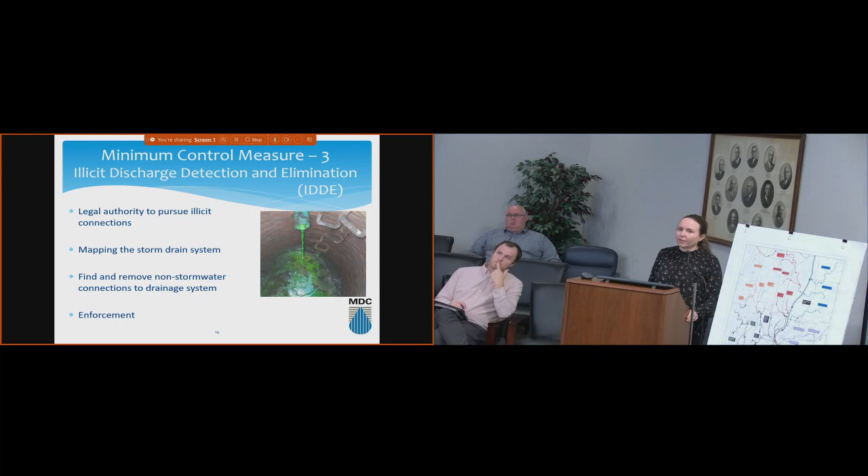And then there's the effort to go into the system and find the illicit connections. Once they find illicit connections, the towns need to use their regulations to enforce them. So on the next slide, I'm going to give an example of how complicated this process is.

This is a typical process for when we suspect there's a connection between the sewer system and the storm drain system. First, we do outfall screening and sampling during both dry and wet weather. The challenge here is there are hundreds of outfalls in each town—we estimate the member towns together have around 3,000 outfalls.

Next, once we've done the outfall testing, we go into the system and test key structures. Basically, we go to manholes, catch basins, and outfalls, and do test kits and sampling to try to find where the illicit connection is coming from—where the bacteria, chlorine, or ammonia comes from. This is a big challenge because it takes a lot of time, and that's where this comprehensive mapping comes into play.

Next, based on that investigation, we try to narrow down where we think the illicit connection is, and commonly we'll CCTV the drains.

So in this, we may find direct connections of pipes going into the storm drain system, and we can also look for cracking, because sometimes the connection between the systems is indirect and can be harder to find, where a sewer pipe could be leaking through the ground into a drainage pipe.

So after the CCTV, we identify buildings that appear to be connected to the system or possibly connected and do dye testing within the buildings. So here, a big challenge is access. You need to contact the owners and do testing within the house. And then even within the house, it's not as simple as putting dye in one sink or one fixture, because often it's an attachment to the building. Often we find that it'll just be one bathroom's connected or one floor drain. So you have to comprehensively inspect and dye test these buildings.

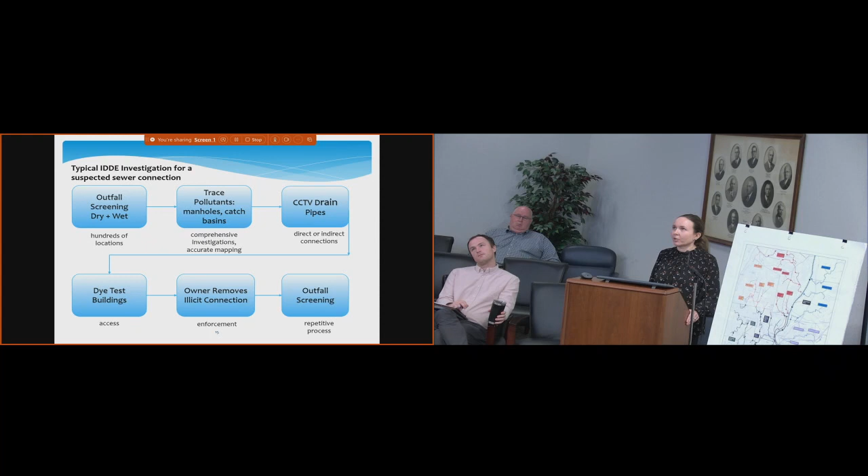So here, the cost of the program is dependent on the drainage system size and the extent of the pollutants. We did review the 2022 annual reports that the towns put online to get an idea of progress, and found that the startup costs, which include the mapping and the baseline dry weather outfall screening, for towns at this point is going to range from $25,000 to $250,000 to come up to compliance. And then the recurring cost to do all these IDDE investigations, we're looking at something on the order of $200,000 to $400,000 per year per town. As you're mentioning, the member towns have 3,000 stormwater outfalls.

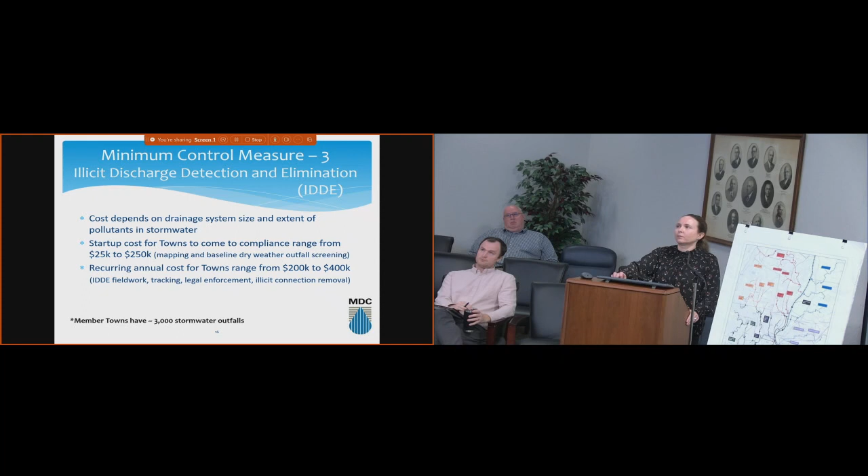All right, moving on to minimum control measure 4. This is construction site stormwater runoff and control. So the issue here is that during construction, polluted stormwater runs off from construction sites and often flows into storm drain systems and gets into water bodies.

So what the MS4 permit action items they're looking for is for the towns to establish regulations for proper erosion and sedimentation control. And as developers come in, the town will review the site plans and make sure they meet those requirements. And then during construction, the town will go out and conduct site inspections and take enforcement actions as needed. Just want to mention that the Connecticut guideline for soil erosion and sediment control, that's the little picture there, was recently updated. The new version came into effect in March of this year, and that covers a lot of the requirements.

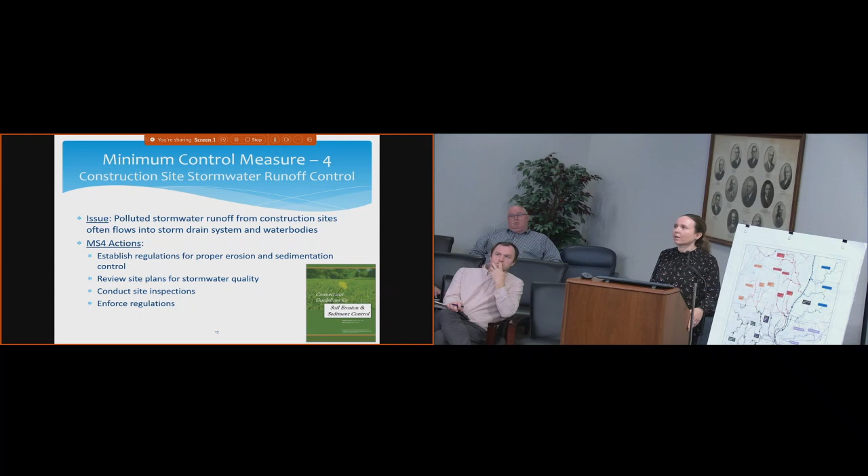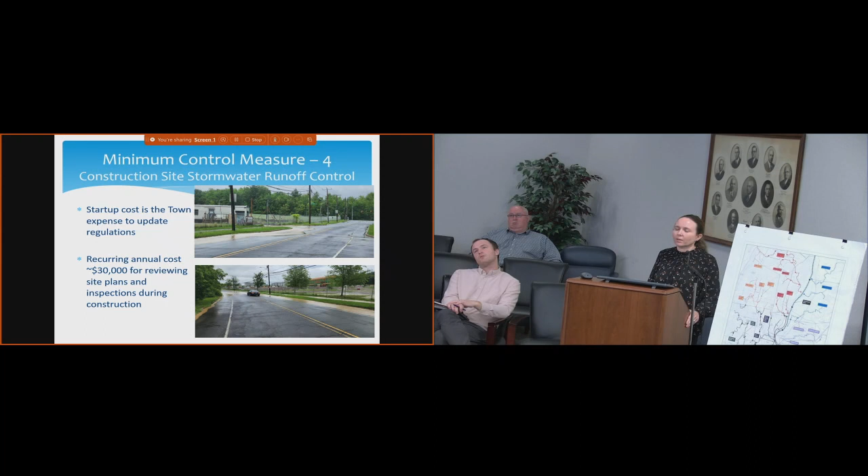So the startup expense for this minimum control measure would be related internally to how much it costs the town to get the regulations in place, and then about $30,000 a year for reviewing the site plans and conducting inspections.

Our next minimum control measure is post-construction site runoff control. So the idea here is that when a site is going to be developed or redeveloped, it's an opportunity to improve the stormwater conditions at the site. So the towns need to establish regulations that require the developers to treat the stormwater and store the stormwater on site.

Again, the state recently updated the manual, the Connecticut Stormwater Quality Manual. That went into effect March of this year. That has more of the MS4 requirements. One of the challenges with this is that the towns require developers to put in detention basins and Stormceptor units, and those items all require maintenance. So either the town needs to enforce that these private systems are being maintained, or they're not going to meet their use, and that's where you get into enforcement.

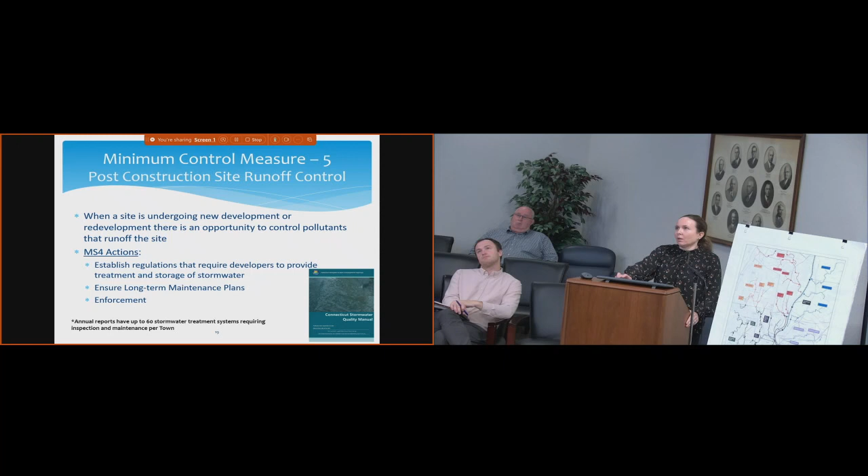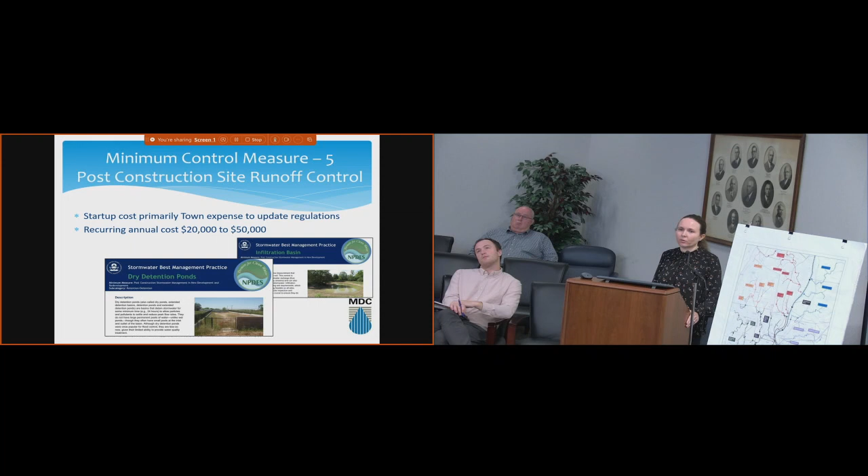So the cost for this minimum control measure, again, the startup is related to the town updating their regulations, and then a recurring annual cost in the range of $20,000 to $50,000.

The catch basin program is a big program. Towns need to inspect the catch basins and set up a cleaning program. No catch basin sump should ever be more than 50% full, so it's a process of learning about the system and then setting up a program to regularly clean the catch basins.

The streets need to be swept at least annually, and it's the same sort of thing where the town should set up and understand their system, knowing which areas need to be swept frequently and which could be on more of an annual basis. The two play in together—if you do more street sweeping, perhaps you have to do less catch basin cleaning.

The next one is an asset management system. The MS4 permit does require that towns maintain and repair their infrastructure, so they need to make sure that the catch basins, manholes, outfalls, and pipes are all in good condition.

And the last one is a really big item for towns: reducing the amount of directly connected impervious area, DCIA. So the idea here is that towns reduce the amount of impervious surfaces they have, and we have a few more slides on this.

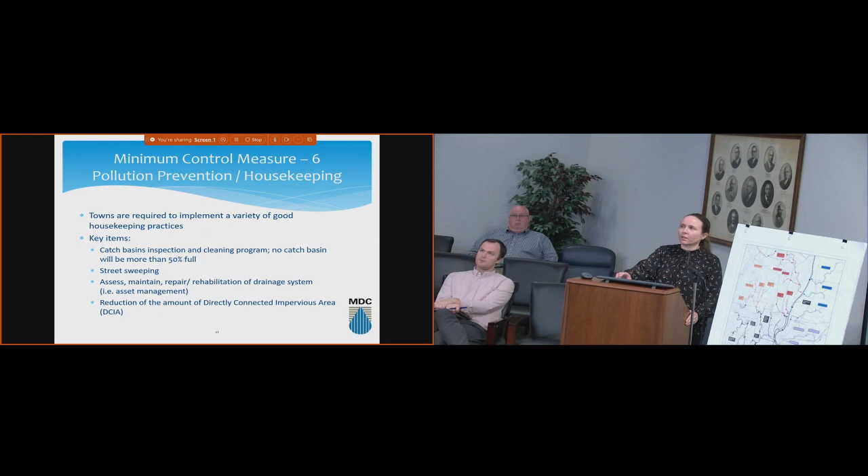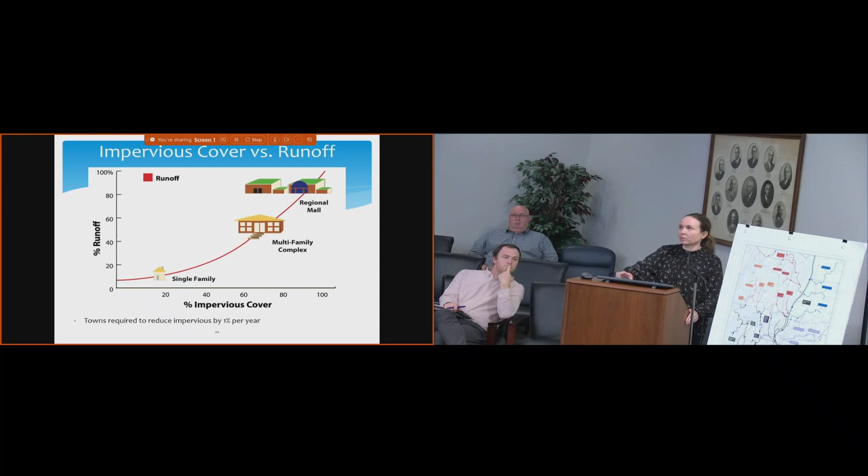And here's a little bit more language from the permit describing the process. First, the towns were to set up a baseline DCIA—they figure out an acreage of impervious area for their town. Then, by the fourth year of the permit, they should be reducing this acreage by 1%. At this time, 3% should have been completed.

This has a very high cost for the communities, we have some numbers coming up. To give you an idea of how towns can achieve this, first they can look through regulation, requiring that developers reduce the DCIA. If you can get a developer coming into town to meet this for you, it's basically a no-cost solution.

Next, if you already have public projects underway, you can incorporate some DCIA reduction and do this at a lower cost. Once you've tried both of those, you get into what they call retrofit projects, which are projects where the intent is specifically to meet this DCIA reduction.

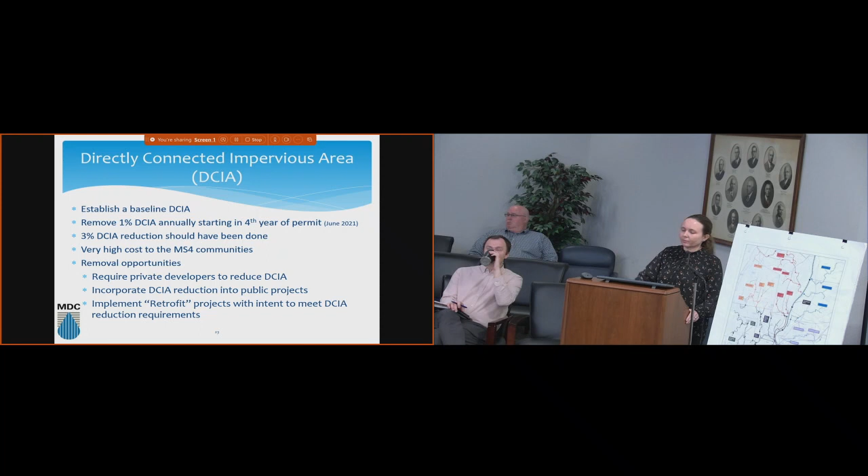So here is a summary of the 8 member towns, based on both internet sources—the CT NEMO has information on impervious cover—and also reviewing annual reports. Altogether, the 8 member towns have about 15,000 acres of baseline DCIA. Every year we should be reducing that by 1%, so that's 151 acres per year. At this time we should be around 453 acres removed, and as of the 2022 annual reports, we're only at 3 acres.

So lessons learned: we spent $1.8 billion and it took us 50 years. The Clean Water Act was 1972, and finally in 2008 we started doing something about it. This is setting the stage for our towns to see a consent order, a consent decree.

This is looking through the forest, through the trees. With sampling, the more our towns don't comply, the more data builds up. The way EPA works—they're doing it right now with the lead and copper rule—is they test, create data, and utilize the data to develop regulations. So this is scary to look at these numbers for our towns. I think that this regulation is almost impossible to meet.

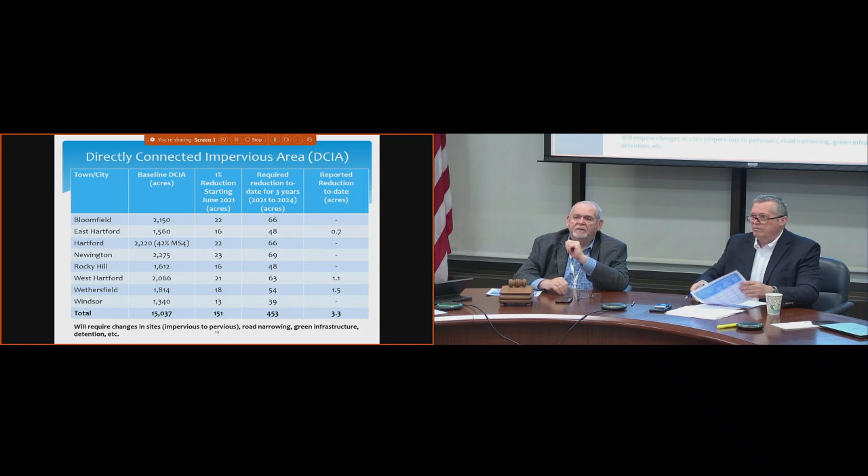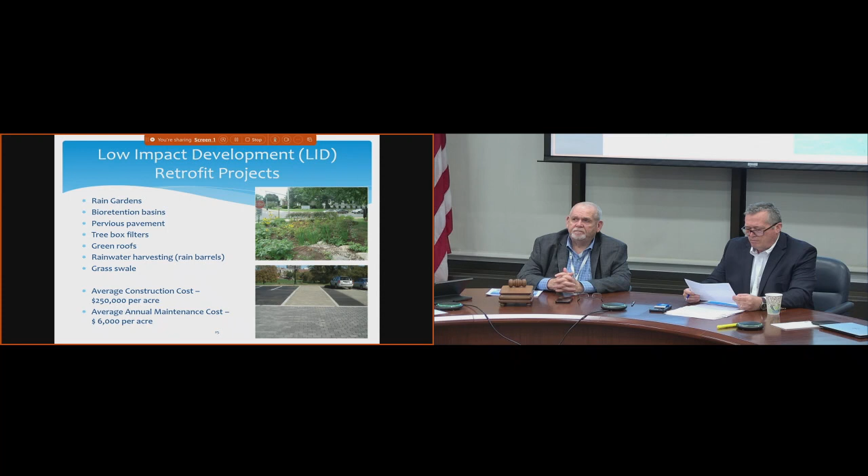So there's a lot of options for reducing DCIA. I already mentioned getting developers to do it. You could also do road narrowing, detention basins. Green infrastructure is something the state is very interested in, and green infrastructure is also called low impact development.

So here are some projects that could be done: you could add rain gardens, bioretention basins, pervious pavement, green roofs, grass swales. There's a variety of these types of options for dealing with the DCIA requirement on a smaller scale.

For this type of low-impact project, the average construction cost is $250,000 per acre, and the average annual maintenance cost is $6,000 per acre.

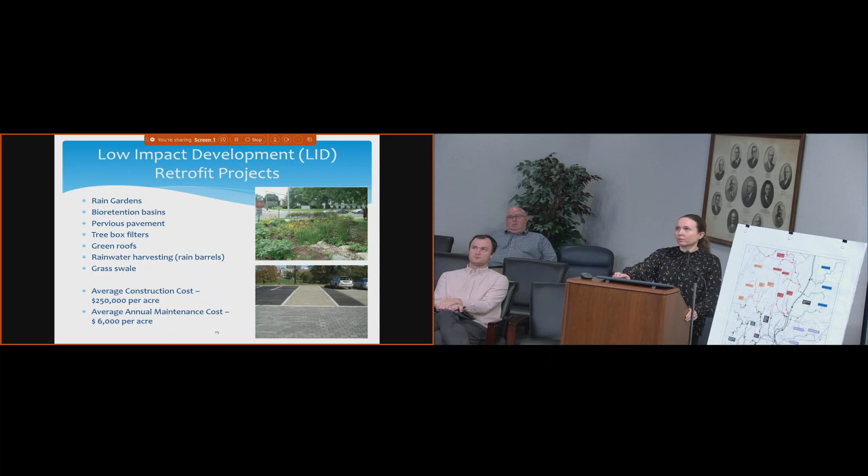I just want to touch again on asset management, because this is a big program as well. The town should be inspecting the stormwater infrastructure to know if the pipes, manholes, and catch basins are in good condition. So this will be a big CCTV program as well as tracking so that they can repair the system.

Stricter regulations are always coming. Now there's kind of a struggle with disposal. You've got the catch basin debris and the decant wastewater from the catch basins that are becoming more challenging to dispose of, often requiring dewatering at a separate site.

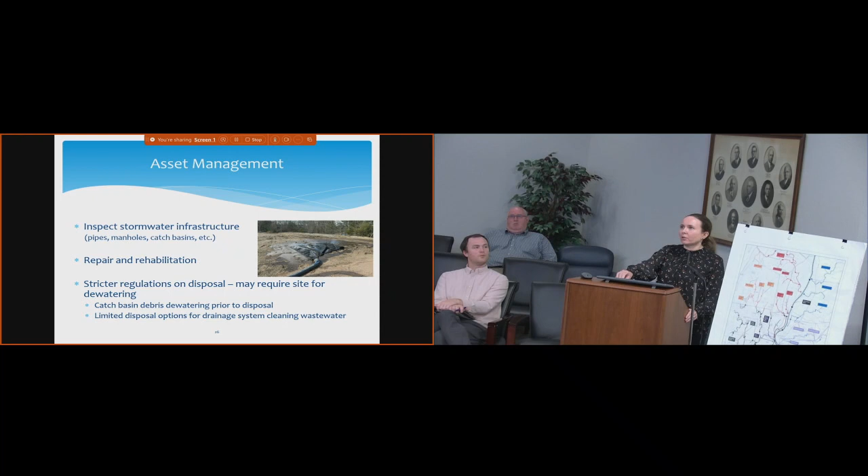And as we're mentioning, these things are related, so if you clean the catch basins more often, you'll prevent debris getting into the system and reduce the pollutants getting into the stream. So long-term, having these maintenance programs will help with your results.

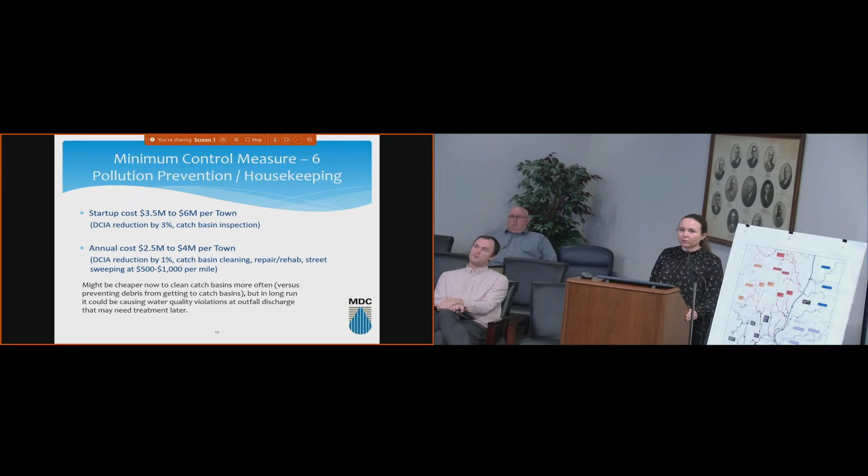And just to add to that, some towns might decide it's cheaper to clean the streets than it is to clean the catch basins, or vice versa. But remember, whatever you do, this is all about being proactive. If you decide not to clean the streets first and just clean the catch basins, that means you're testing as well—you've got 3,000 outfalls, you're creating data.

And every piece of data you create that shows bad results, EPA is putting it in your future consent order. So it's really important—when you decide it might be cheaper to clean the catch basins more often, if you clean the streets more often instead, you're not creating the water quality testing problems at the testing points at the outfalls. Yep, those are great points, Scott.

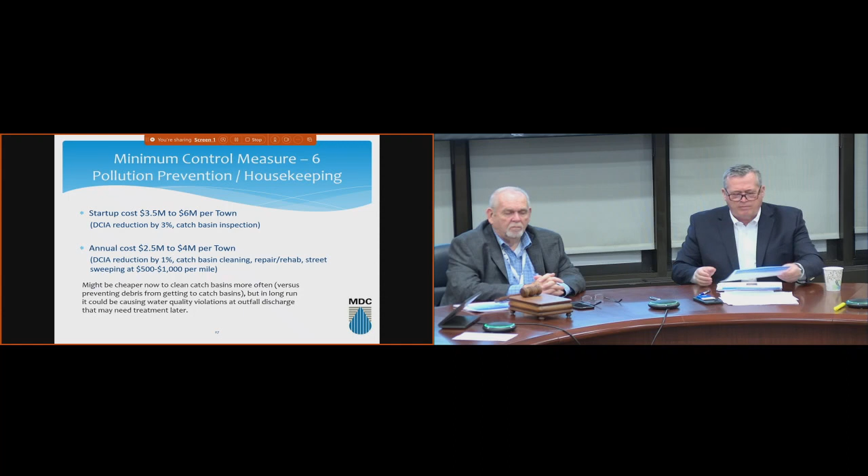And I have here, fitting in with that, a detailed list of the outfall and interconnection requirements. They fall under a couple of categories, but there's both wet weather and dry weather requirements. The outfalls that discharge directly to impaired waters have more requirements, and the IDDE program is a 10-year program, so by the end of 2027, towns should have done those catchment investigations. In most cases, it's townwide for the member towns.

And this data is all being sent to DEEP annually so they can see your progress. They know where your outfalls are. They know if you have clean outfalls or exceedances and what follow-up work you're doing.

And the word interconnection, I'll just touch on that briefly. We estimated 3,000 outfalls where the stormwater discharges through a pipe into a water body that everyone's familiar with. The interconnection is where two MS4s meet, and in most cases for the towns, it's where the town MS4 system discharges into the state MS4 system—so the town pipe goes into a state road. That location where it discharges is called an interconnection, and those are to be treated as outfalls as well.

So all the requirements of sampling and IDDE are required at those points. And I feel like a lot of towns are still working on the mapping of those and coordinating with the DOT.

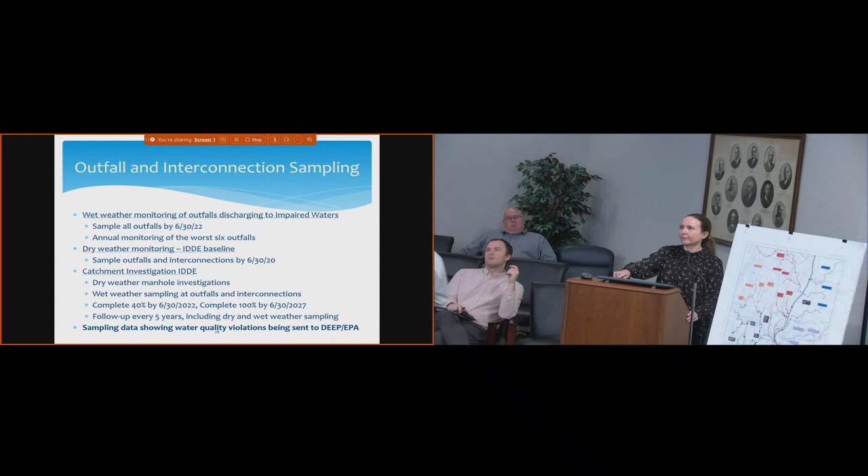So the cost for towns to come into compliance is in the order of $100,000 to $250,000, and then going forward, the outfall sampling cost is around $75,000 to $100,000 per year.

So, compiling all those numbers that were spread out through the presentation, we came up with about $41 million for the towns to come up to compliance, and then going forward, about $31 million per year to maintain compliance.

I think that's the end of my slides. Let me just check.

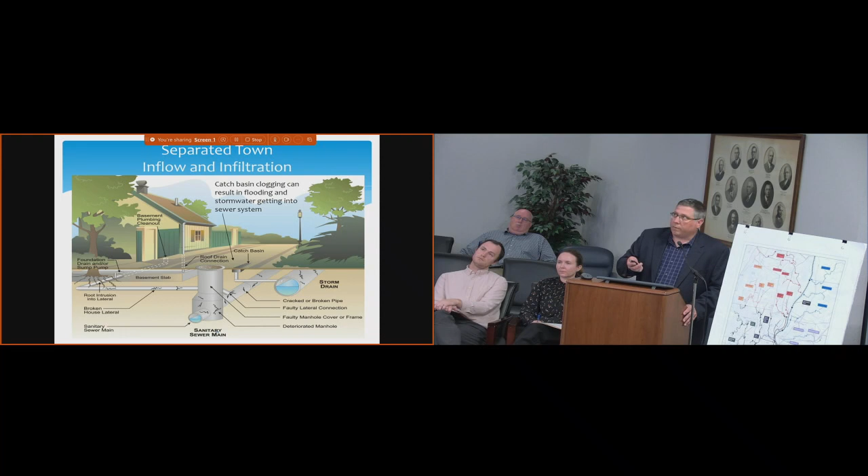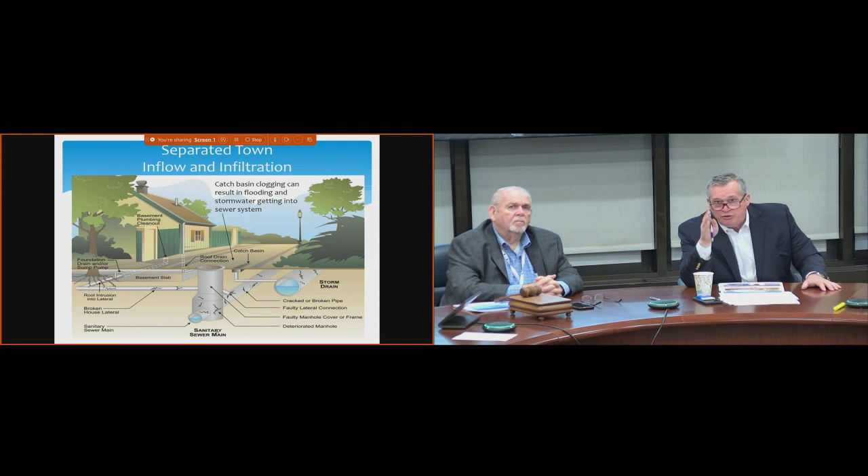And this is the ironic part: Hartford is a CSO community, one pipe. Now we're changing that. We're going to separate everything, and we'll have brand new storm pipes over the next 50 years. But the majority of our 7 towns don't have the storm pipe, but they're supposed to, because it's a separated sewer system regulated by EPA. So what happens when there's no storm pipe in a separated storm system regulated by EPA, not the state of Connecticut? The water comes into the MDC system through basements, through foundation drains, through rain gutters, and that's part of the problem. There's no storm pipe everywhere in our other 7 towns.

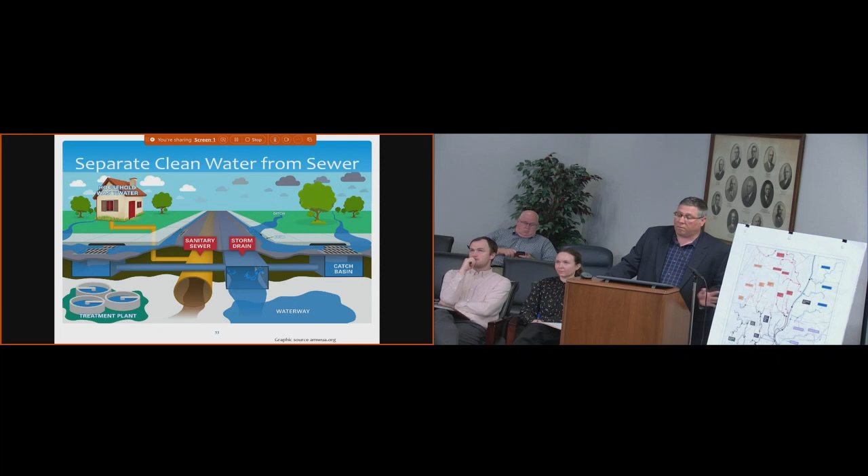So if you were to build a new development today, this is how you would build it, and this is how it would function. Sanitary goes to sanitary sewer, storm drainage goes to storm drain, which ends up in a waterway. Obviously, the sanitary sewer eventually ends up at the treatment plant. No defects, no cracks, a completely perfect system.

Unfortunately, our system is not perfect. This is how you end up with numbers such as shown on this slide. Some of you have probably seen this picture before at other presentations, where in each town you've got two numbers shown on the screen. I'll use Bloomfield as an example, 2 MGD. What that means is on a dry weather day, 2 million gallons a day comes from Bloomfield, which greatly matches the water sales plus some low-level infiltration. However, on a stormy wet weather day, that number can get up to 11 million gallons a day. So that's that extra stormwater that's coming into our system.

Right now, when you add it up across all of the district's 8 member towns, that adds millions of dollars a year in extra transport and treatment costs.

Now, unfortunately, as we proceed through our consent decree work and get this water out of our system, the water just doesn't disappear. Whether it means extra groundwater elevating the groundwater table, or somehow it has to get connected to a storm drainage system - it's kind of like that picture from middle school we all probably remember from science with the water cycle. We don't wave a wand, it doesn't just go away. So as we get it out of our system, it's going into something else, whether it be the town's stormwater system or a water body or whatnot.

But even that, which I'll get to, affects everyone.

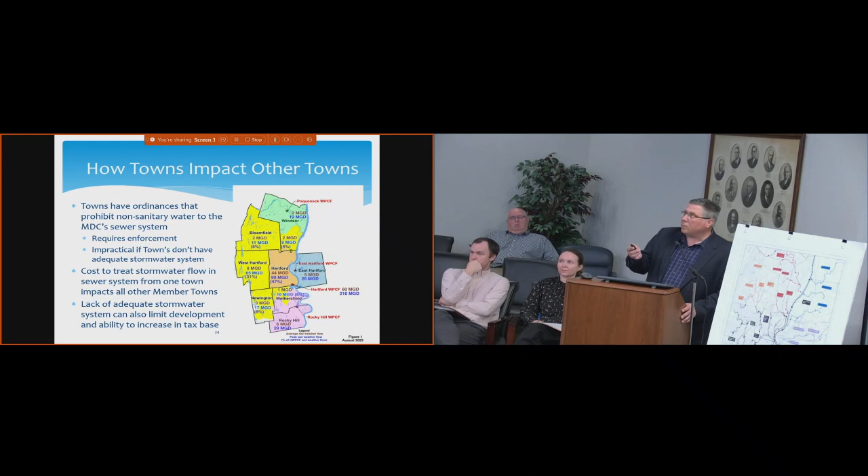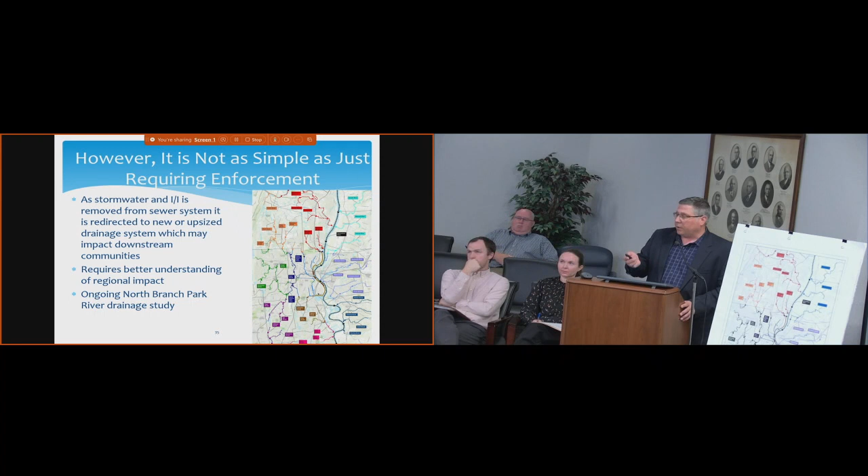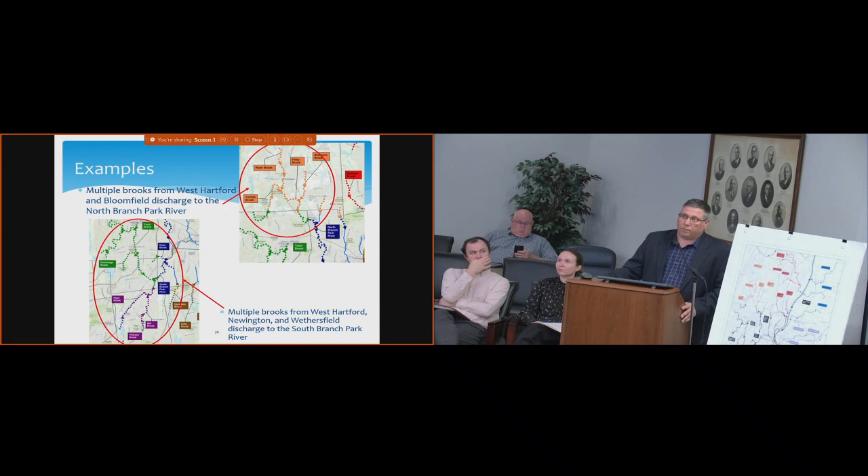Now, as Emily focused on in the MS4 presentation, MS4's priority is pollutant control.

As Emily mentioned in her presentation, MS4 is primarily focused on pollutant control. It is not focused on street flooding—MS4 doesn't care about street flooding. Obviously, there are activities within MS4 that can cause more street flooding to occur, but the regulation itself is not focused on street flooding.

However, as many of you in this room know, the complaint you're going to hear from the public is flooding—whether it's yard flooding or street flooding, that's the most common complaint with regards to stormwater. So as some member towns decide to initiate a stormwater project to fix flooding at an intersection, you have to remember that water eventually ends up in another town. For the majority of our towns, it ends up in Hartford, but as that happens, it's going to end up there.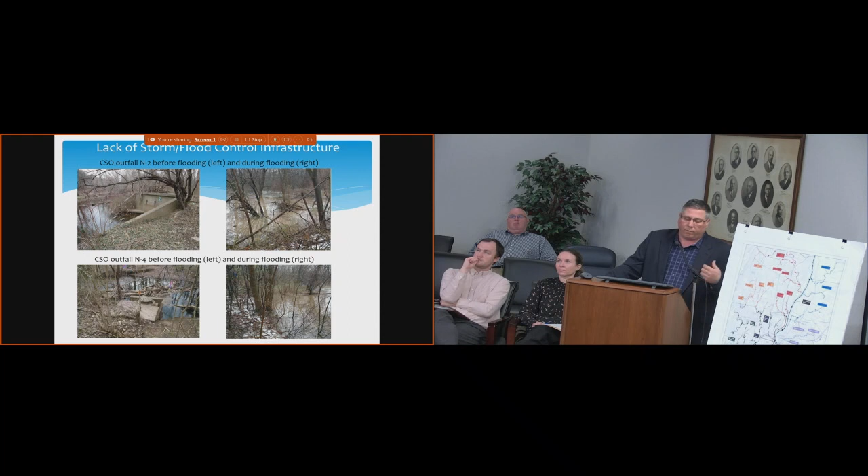The outfalls on the left flow fine on a low river day. However, on days of extreme wet weather with a lot of drainage coming from upstream, that river has a very high, quick peak—that's what happens in the pictures on the right, the same exact locations as on the left. When the river is that high, the overflow cannot function; those pipes can't discharge to the river, because there isn't enough head behind it to push out into the river in most cases. So either the CSO sits in the pipe and builds up, stacking in the queue until the river elevation comes down, or it backs up into the adjacent system.

More importantly, those outfalls are tied to local storm drainage in Hartford as well, so that storm drainage also cannot get out of the system because the river is high. The river is high because a lot of water is coming to it, and as I showed a couple slides ago, that location is taking drainage from Bloomfield and West Hartford, as well as parts of Hartford. So this is just another 'everyone's in this together' kind of concept.

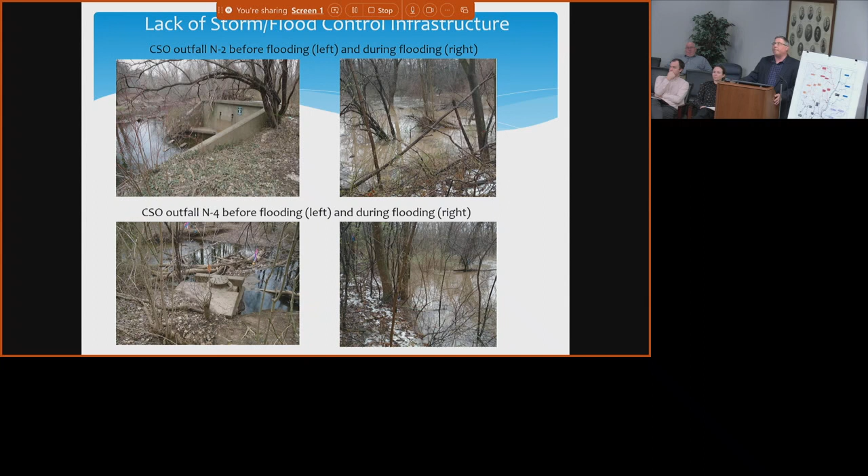Jay, before you leave—this is really important, right? This is a highway for water. Jay mentioned the towns that flow into Hartford: Newington, Bloomfield, Wethersfield, West Hartford.

It's ironic that those same towns are part of the Hartford Flood Commission. Why? There's a reason - because these waterways are highways to get water out of our towns. If you go back to the slide, Jay, on the pictures - why should East Hartford or any other town care what happens in this river? Here's the reason. I call it taxation without representation.

There's two options here. We're doing a study on this river. We need this river to exit our stormwater that we're separating in North Hartford and discharge it. As Jay mentioned, we do everything by gravity - that's why the MDC's rates are so low. But if this river is too high in wet weather conditions, we're going to have to pump it.

Dredging the river is $50 million. A pump station is $100 million, plus the maintenance associated with pump stations forever and ever. More importantly, EPA has already told the city of Hartford they can't give CSO money for dredging a river - it's a flood control issue. And they've told us they can't give $100 million for a pump station because it's a stormwater pump station - it becomes a flood control pump station once we separate it.

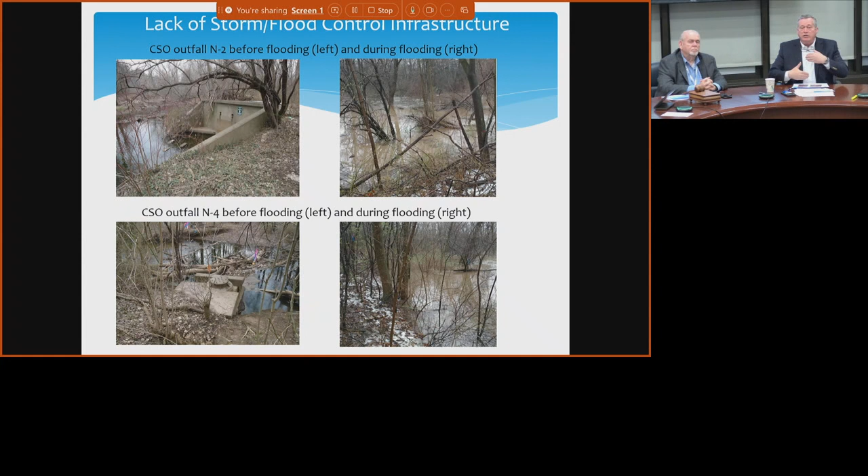So this is a major problem, right around the corner. This summer we need to make a decision as a body, as our towns, what are we going to do - because the drainage study is going to be complete and we need to move forward. It's either dredging the river or spending $100 million designing a pump station. Go ahead, Jay. Thank you.

As Scott mentioned, the Hartford flood control system is managed basically by 4 towns. So this is already an example of at least half of our member towns acting in a regional body with a regional responsibility for stormwater control throughout the system, as it goes from the outskirts - say in Newington, West Hartford, or Bloomfield - eventually to the Connecticut River.

They trigger when the Connecticut River is at certain elevations. Most of them work - the Bushnell Park Pump Station and the Keney Lane Pump Station are the ones that function most of the time. The Armory and Pope pump stations barely ever come on, if at all. Using Bushnell as an example, its main purpose is to pump local drainage into the conduit. So when the conduit is high, or the Connecticut River is high, it kicks on and sends that local drainage from the city of Hartford into the conduit because it can't get there by gravity.

Now, as other towns develop and send more water down the pipeline, whether it be the North Branch Park River or South Branch Park River, that Park River conduit will be impacted, which will have some impact on the Bushnell Park pump station as it has to come on either longer or more frequently.

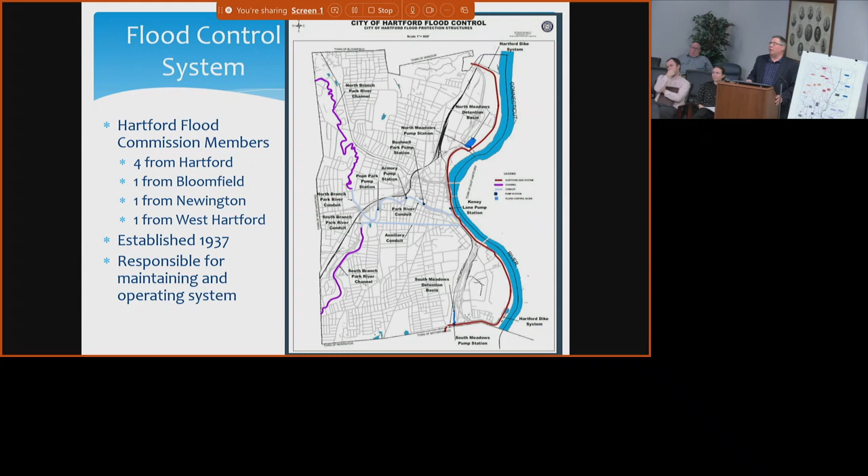When we did our long-term control plan update back in 2018, approved in 2022, there was a large focus in that plan on rehab of our system - that was the initial thing we wanted to do. We have approximately 1,220 miles of sewer system throughout our 8 member towns. This plan included the rehab of a minimum of 400 miles, roughly 30 to 40 miles a year, for the first 10 years of the program.

As I showed at the very beginning, we had those defects in the sewer system. Basically, prior to lining, our sewer system acts as a French drain. It's taking everyone's groundwater, sending it down the pipeline, and it eventually gets into the sewer system or backs up somewhere else. That sewer system is everyone's French drain. So as we line our sewer system, and now actually line laterals too, that French drain is no longer available. So when the French drain is no longer available, the groundwater table is going to come up.

Early on in my experience here at the district, there were a couple of cases where we got complaints from residents saying they didn't have groundwater in their basement, but now they do. And the only thing we did was line the sewer—we didn't even touch the laterals in some cases. So the water's got to go somewhere. It goes back to that water cycle analogy. We're not just getting rid of it; we can't just wave a wand.

So now as we line our sewer system and that groundwater table comes up, it's either going to go back into the system through the lateral if we hadn't lined it already—but that is our new policy going forward—or it has to come out through a foundation drain. Now, we still don't want that water in our system; it's not helping us for consent order or consent decree compliance. So the ultimate goal, which we've done in a couple different locations early on as a pilot, was to disconnect that foundation drain, install a sump pump, and then discharge that water to the town's storm system.

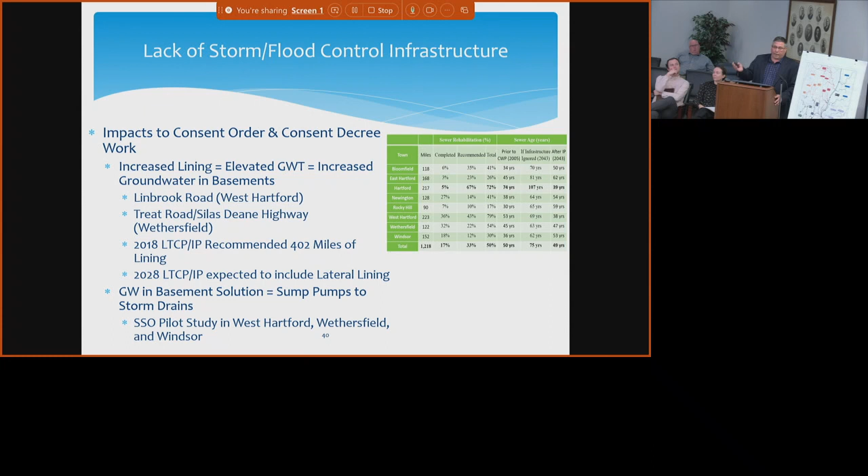So when you take that small pilot study, which we did in 3 small neighborhoods in the towns listed on the screen—West Hartford, Wethersfield, and Windsor—and you apply it throughout most of West Hartford, most of Newington, and good chunks of Windsor, that's a lot of extra water that's going to get removed from our system and has to come into those storm systems. Now, in some cases, those storm systems don't exist, which means, do we just discharge outside, or do we have to have the town extend a storm system? But eventually that water, like I pointed before, is going to end up in the Hartford flood control system from those towns.

So as Scott mentioned, we're doing a drainage study in the North Branch Park River area. The main point of that study has 2 components: what do we need to do for separation to have full CSO elimination for those 2 CSOs, N2 and N4, that were shown in those pictures, and also what drainage infrastructure and flood control infrastructure needs to exist in order for that separation to function. We don't want to separate this system, eliminate the CSO, and then basically have the water have nowhere to go.

In similar fashion, as a result of what's called Tunnel Contract 4—basically the CSOs to Cove—being paused, we are doing a similar drainage study in the Franklin Avenue area. That's in our consent order, due by the end of 2027. The scope of that is going to be very similar to North Branch: what separation do we have to do to eliminate CSOs, and where can that water go? So that's the Hartford component. Obviously, that concept will eventually be applied throughout Hartford, but those are the two focus areas right now because those are the CSOs that are high priority in the consent order.

Outside of Hartford, the only way to comply with our consent decree fully is to get the water out of our system. Now, we can only line so much. As Scott mentioned, it's not going to completely solve the problem—that water will eventually find its way in. We can line the main line, we can line the laterals, but as the groundwater table comes up, it's going to come in through foundation drains. We've actually had lining projects where we had problems with a section of mainline sewer because of the volume of water coming in through a gravity foundation drain. So it's not a small problem. In some properties you may not see anything, but a lot of properties have a lot of water.

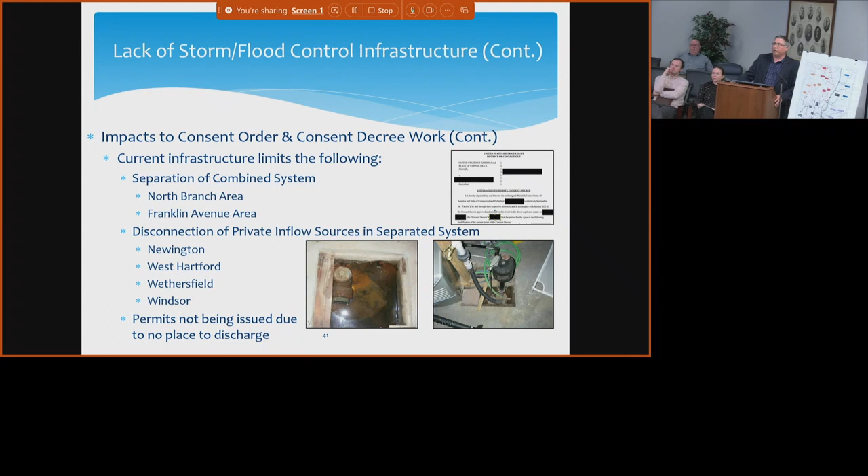Now, obviously, this involves coordination with the towns on multiple different levels—whether it be, do I have a home for this water, can it go into a storm drain, is that there, does the storm drain need to be extended, and if so, how. Then you also have to have all this work get permitted by the local building department, so sometimes that becomes a challenge. Obviously, if the stormwater doesn't have a storm drain to go to, in some cases you can discharge to a yard, but in a lot of cases you can't because it becomes a nuisance issue. That's kind of the rock and the hard place we're up against in a lot of these scenarios we've been working with the building departments on.

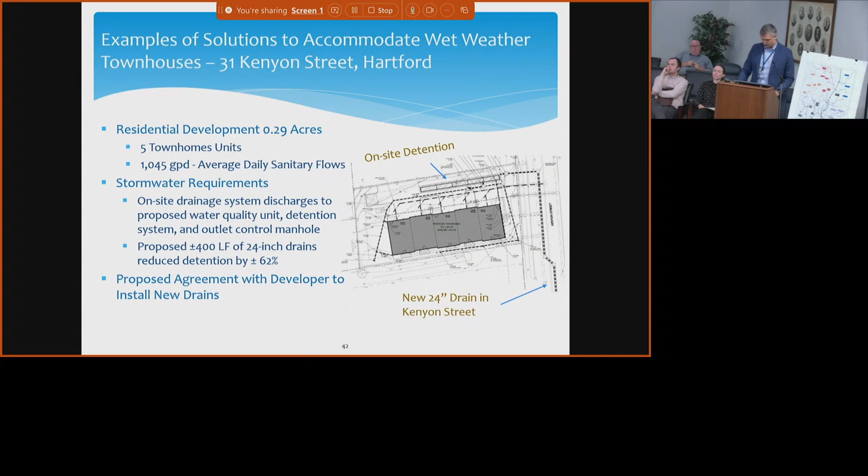Moving to the second opportunity, a recent development that's ongoing and approved in West Hartford: 1700 Asylum Avenue. This is a new site currently discharging zero from this location. This is a separated community in West Hartford - separated storm, separated sanitary sewer. Based on this site, they'll be discharging almost 68,000 gallons per day of sanitary sewage to our sanitary sewer system. But as shown in the previous slide, on a wet day that sanitary sewer goes from 8 MGD to 65 MGD, and it ultimately comes into the Center Brook Trunk Sewer, not far from this site.

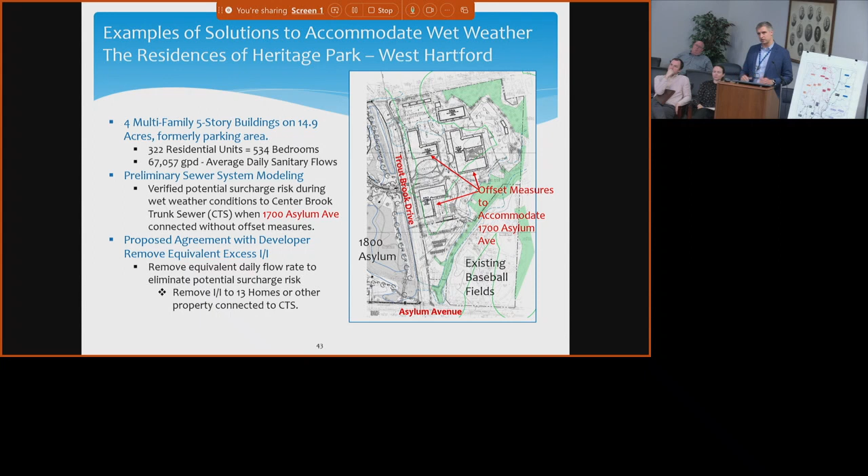Ultimately, that causes issues for property owners along that area, as well as for MDC in maintaining and meeting our consent decree. So the idea was how we can accept this and support the development while making sure there's no increase in damages or impacts to our customers and residents. We looked at this and determined that if we can work with the developer to remove that new inflow from other sources, there's no increase in what we'd see on a wet day - that was ultimately the solution for this case.

And then ultimately, another development in Hartford is the Arrowhead and Flatiron redevelopment site.

This was a case where that development was able to meet the requirements of the City of Hartford's planning and zoning for no net increase, and as far as discharge rate, they were able to meet the stormwater quality requirements. But ultimately, MDC knew at some point, as far as our consent order, that we needed to separate this area. So teaming up with the developer, understanding can we put a storm drain in there, and how would that affect the site positively? This site was able to, in coordination with the City of Hartford Planning and Zoning, ultimately reduce the size of their detention because there's an existing or soon-to-be proposed storm drain they can discharge to, which allowed them to go from essentially a 100-year detention system down to a 10-year detention system for peak discharge rates. This was a significant cost reduction for their site development, as well as it freed up valuable space on the site for the developer.

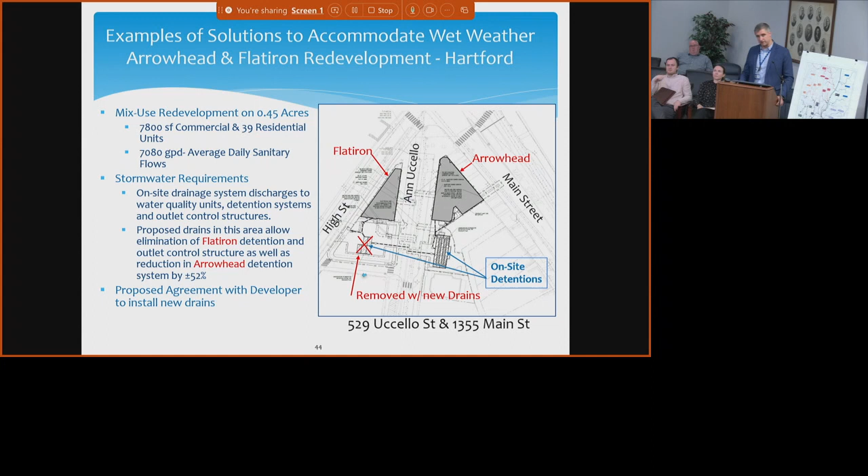So these are a number of the scenarios that we do have. Just quickly go through.

Before you continue, I just want to make this point. We use these examples as good examples, working with the cities of West Hartford and Hartford. But this exists. This is happening in Newington. This is happening in Wethersfield. This is a problem for everyone. And whoever has storm systems that can allow development will have more tax receipts than the other towns. The MDC can't solve this problem in the 7 towns. We're going to solve it in Hartford over time, but we're not going to solve this problem in the other 7 towns. So this is an example of how...

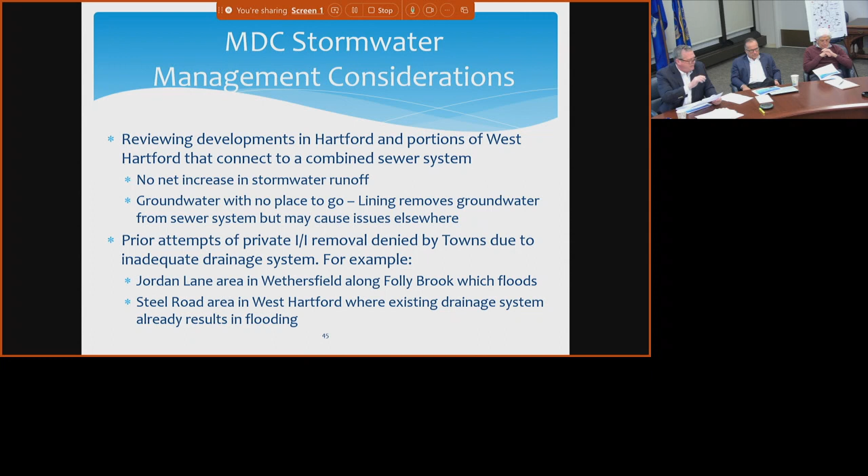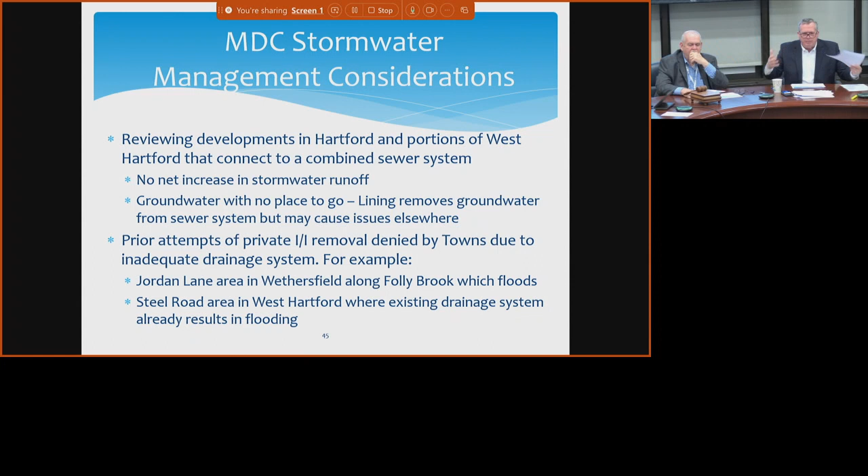I give West Hartford credit because they've stepped up and identified $300 million worth of stormwater work. They've hired CDM and they're moving forward with a stormwater management plan. But our towns have got to realize that this is just the start of MDC saying we can't accept your development into our sewer system, not because of dry weather, but because of wet weather flow. So these are good solutions, individual solutions, but there are situations arising that there won't be an answer to. There won't be a solution to it. And that's where the towns have to worry about the expansion of their town, the development of their town, and how it's being dictated by stormwater infrastructure.

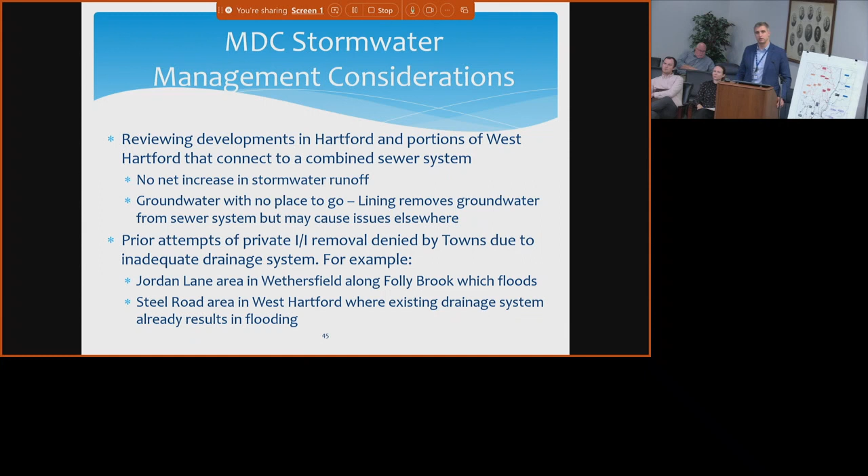Sorry, Chris. No, thanks, Scott. And just a summary, Jason covered a bunch of this, but as Scott mentioned, we're continually looking at these opportunities across all the towns, working with the town public works and engineering departments to identify opportunities where we can support this and ultimately meet both beneficial goals. So I'm going to hand it over to Scott, thank you very much.

So I have 3 slides, and then I'm going to ask Matt Hart to talk a little bit from CRCOG. I'm going to whiz through these because I've already said a lot of this stuff, so I'm just going to highlight. I don't know who's got the clicker over there, but I'm just going to highlight. I've already said this stuff, but it's really important. Thank you, Julie.

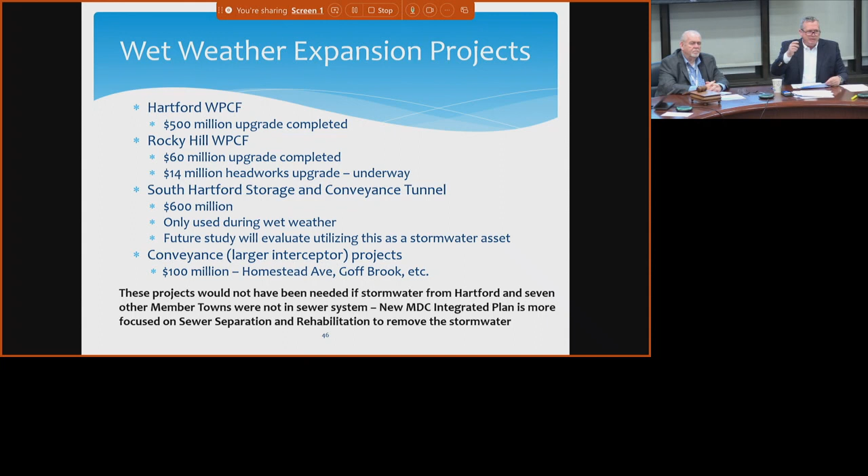We've already spent $1.8 billion, and we're addressing wet weather flow. We're addressing collecting what's coming to us, not removing it. We're just going to keep doing this, keep spending money, but we're not addressing the long-term problem. I think we really need to imagine if we spent $1.8 billion in all of our 8 towns on putting in storm systems. We wouldn't have built the plant. We spent $1.8 billion, and only 1.4 to 1.5 billion of that was making things bigger, making the plant bigger, making CSO tunnels, making pipes bigger, but only 300 million of it was doing separation work. Now we've got the regulators realizing that that's the wrong solution, North Hartford, so we're moving forward. But this is a really important time for our towns to think about this.

The next slide is just reiterating the very fact, right? So in the 80s, we were using 80-some-odd MGD of drinking water. So it should match up with the dry weather flow coming to the plant. The plant size is for 80 MGD. Here, just on our member towns, we're really only sending 28 MGD. We're utilizing 28 MGD a day from our towns. But so that should be coming to the plant, right? Because the rest of it is watering your yard and doing those functional things with water.

But so where's the rest of the water coming from? Even on a dry day, it's 60 MGD. Well, it's got to be from groundwater tables. I've said this a thousand times. In Newington, the groundwater table is 8 feet above our sewer pipe. So obviously, people in Newington have to pump water out of their basements just to keep a dry basement. So it's not going away. It's only going to get worse.

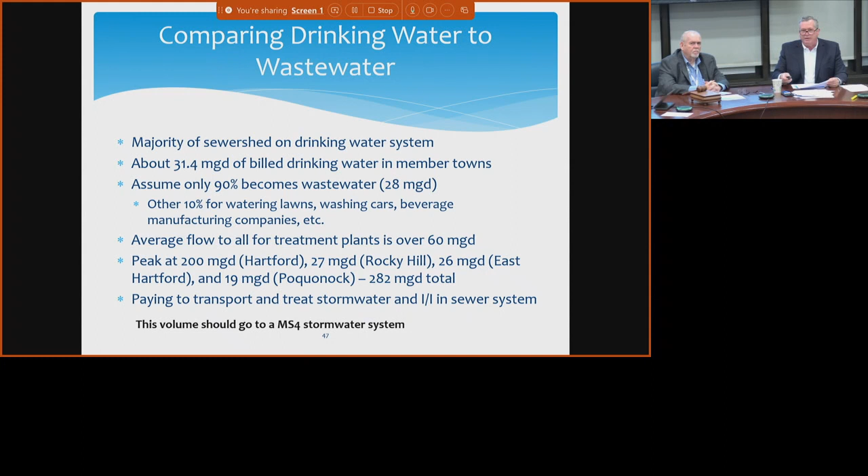And then the last one, which is probably the most powerful one, I hope everybody can see it because I need to look at it myself since it's too small up there.

Everything we've said, here's taxation without representation. Why do I care? Why do I care about Hartford? Why do I care about West Hartford? Why do I care about Wethersfield and Newington?

Because the towns that say they don't have a problem—and I'm going to use East Hartford as an example, if you don't mind—this slide shows we spent $1.8 billion, and we're treating stormwater in the sewer system. We've calculated how much the stormwater cost is to treat at the plant.

So taxation without representation—I'm going to use East Hartford as a good example, Mayor. East Hartford's paying $1.2 million of their ad valorem to treat stormwater every year, and it's just going to keep going up. And they have no control over it.

Zero. Imagine if we could take these numbers—2.6 million for Hartford, $1 million for Newington—imagine if the towns could use that money to actually get the wet weather flow out of our towns. That's the important part of this conversation.

You're spending money, you will continue to spend money, and the other 7 towns aren't getting a penny. They're not getting any infrastructure out of it. Hartford's getting all the infrastructure because it's a CSO community.

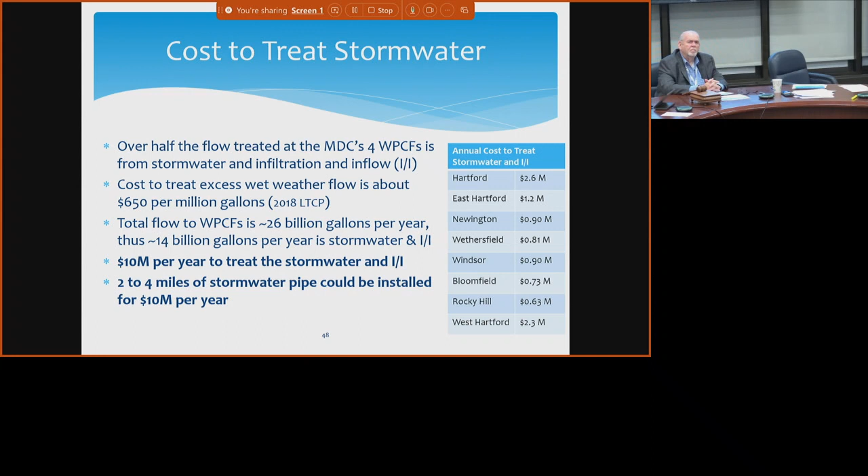All right, good morning, everyone. For those of you who I don't know, my name is Matt Hart. I'm the Executive Director at the Capital Region Council of Governments. I'm joined today by my colleague Heidi Simokar, one of our principal planners at CRCOG. I previously worked with the town of West Hartford, where I began to learn a lot more about this issue, along with Mayor Cantor and Greg Summer and many others.

So CRCOG, we think we have a role to play here too. I've got a handful of slides I'd like to work through with you, and spend most of the time on the last slide.

So a little bit about our region. We're comprised of 38 municipalities, including all 8 of MDC's member towns and 30 others. In stormwater management, it's not just an issue in the MDC region. The city of New Britain is really grappling with this, the town of Southington, even our more rural communities like Columbia are struggling with this issue.

As you can see here, we go west to the town of Southington, east to the town of Mansfield, and then north to Massachusetts in both directions, serving a residential population of a little under 1 million people, a geographic region of over 1,000 square miles. So very good size by Connecticut standards.

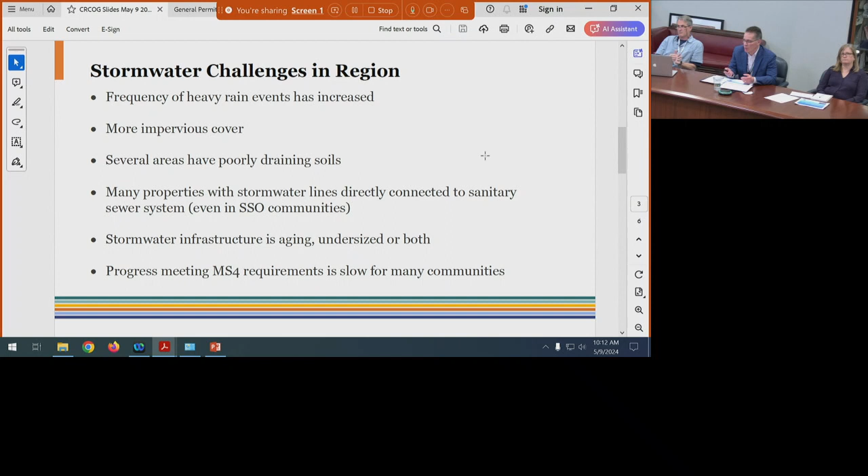At CRCOG, we provide a range of services to our member towns, including regional planning and development. With that hat on, we began to think about, a year and a half ago, this concept of a stormwater authority. The state has recognized the financial burdens associated with stormwater management, and relatively recently, in '21, passed legislation that would allow our municipalities to create a local stormwater authority.

They can establish that as a new entity or assign it to an existing body, like a WPCA. There are over 1,800 of these across the country in 45 states, but only two in Connecticut thus far. The city of New London was the first, followed by the city of New Britain. So it hasn't really taken hold yet in our state.

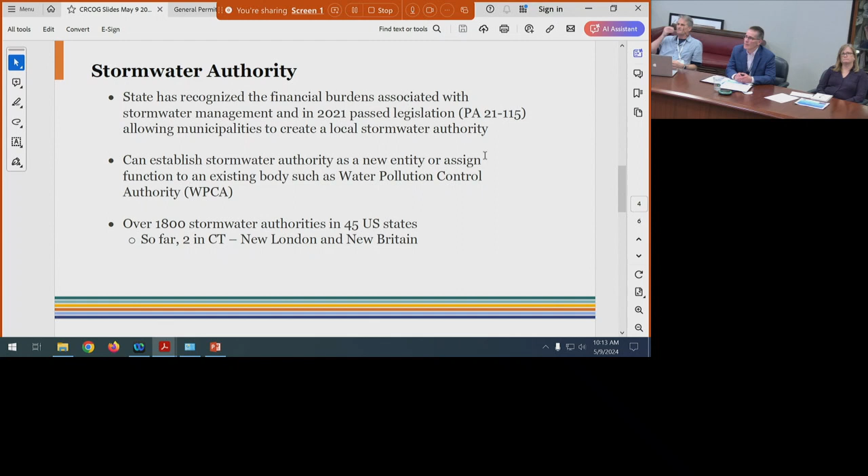Understand, the legislation is only a couple years old. So, what can a stormwater authority do? What can a stormwater utility do? What benefits does it have? Well, number one, it has the ability to levy a separate user fee for stormwater management. And as you can imagine, these fees can be controversial, right? They can be called pejoratively a rain tax and other things.

But it can be a very, very important revenue source. It can be used for education and planning and infrastructure, such as the infrastructure we've been talking about this morning, including traditional infrastructure, as well as things like rain gardens and bioswales. There's some great green technology and infrastructure that's emerged over the last couple of decades that could potentially be applied here.

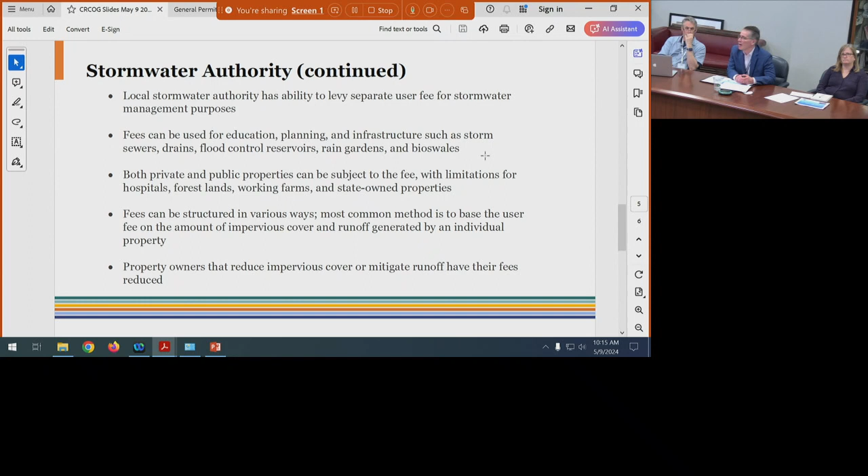Interestingly, with this fee, unlike the local property tax, both private and nonprofit and public properties can be subject to the fee, a limitation set out under state law. The fees can be structured in various ways, governed again under state law. The most common method is to base it on the amount of impervious cover and runoff. Property owners that take steps to reduce their impervious cover or mitigate their runoff can have their fees reduced. It's an incentive there.

So at the Capital Region, we've been awarded a $250,000 grant, a Climate Resilience Fund grant from DEEP. And we're going to use it to conduct a study looking at the feasibility of establishing a regional stormwater authority or utility. We're going to look at benchmark examples from other states, such as what's existing in Pennsylvania. There's some really good models there.

We will look at financing. How can we finance infrastructure? How can we finance operations and maintenance, maybe through these stormwater fees? We'll look at governance structure. How could such an authority or utility be governed? What would be the best model for that? Do we need one across all 38 towns, or would we want multiple serving a smaller number of communities, like the MDC towns?

How would we handle operations and maintenance? So we're finalizing the budget and the scope of work with DEEP right now, hoping to execute that in the not too distant future. As part of this, we want to explore partnership opportunities with the MDC and potentially with other WPCAs.

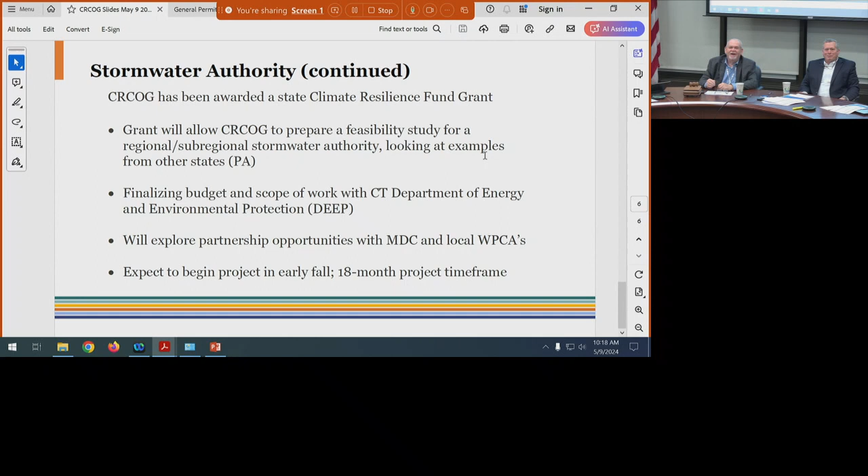Thank you, Matt. That concludes our presentation. Are there any questions from any of the representatives from our member towns? How about a commissioner question? Well, I wanted to get them first, but we'll get to that. Seeing none there, we'll open it up to questions from commissioners. John?

In all of these presentations, I did not hear any reference to the state of Connecticut. It strikes me that the state owns a lot of highway that runs through all these towns and has a lot of stormwater discharge that goes somewhere. It would seem to me that there ought to be some role for the state to play, or they need to be involved in these conversations in some manner. So I'm just wondering, what's the thinking along those lines?

Chairman, yes, Commissioner, great question. The state DOT is required to comply with MS4 as well, so it's not just municipalities. The challenge you're referring to, and we agree with you, is this whole issue about stormwater and what the state's role is.

We just had a meeting this week with DOT talking about Pulaski Circle and their responsibilities. It's a state road, they own the storm system in Pulaski Circle. Our position is the state of Connecticut needs to do something because it floods. We all know Pulaski Circle floods. Same thing with Albany Avenue, same thing with Bloomfield Ave. So we agree with you.

We need DOT. A lot of these off-ramps dump into our cities - I've lived this with my career. DOT gives you a highway, dumps it off into your city, and says, oh by the way, here's the stormwater that comes with it. So it is a real issue, and we agree 100%.